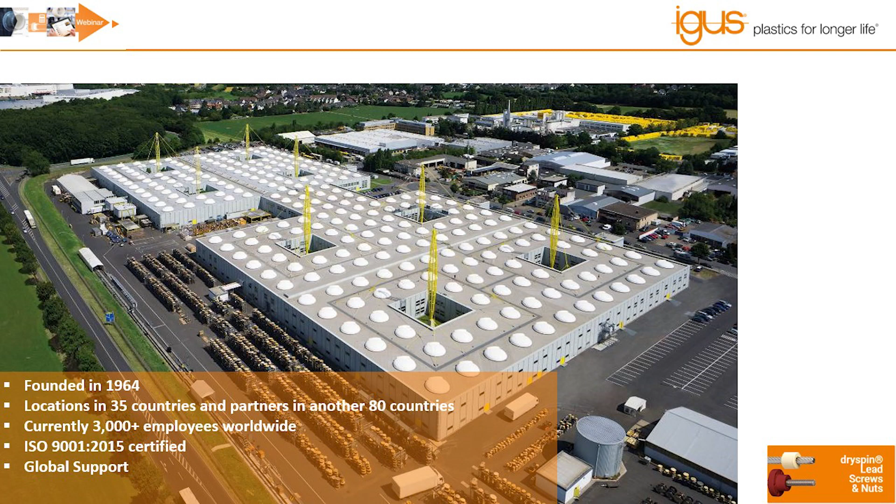For those of you who are not too familiar with igus, we were founded in 1964 in Cologne, Germany. We have since expanded to over 35 countries across the globe, with several thousand employees worldwide. Here at our location in East Providence, Rhode Island is where we are headquartered for all of North America, serving as our distribution center for the US, Canada, and Mexico. This facility is constantly growing.

Some of the new and exciting things we're looking to do in the next few years as part of our 5-year plan - we've already started to expand at an old facility down the road from igus, where we are starting to produce and do injection molding here in the United States rather than solely relying on our headquarters in Cologne, Germany. Currently we have about 40 injection molding machines, and we have quite a few goals to add more. We also have a number of sales reps from across the country.

All of these sales reps are able to do in-person visits with all of you to discuss your applications and find out if igus can help provide a solution. igus has a number of different product lines here, split up into a couple different divisions. We have our cable carriers as well as the cables that go inside of them, a number of which are used in the packaging industry and 3D printing industry, and are found quite commonly.

We have a number of different components that we provide to our customers here at igus. However, at our core, we are an injection molded polymers company. So we specialize in creating compounds that are filled with all different types of fibers and filaments and solid lubricants. igus's goal is for you to get products from us that are maintenance free, where you do not need to use an additional lubricant with our materials.

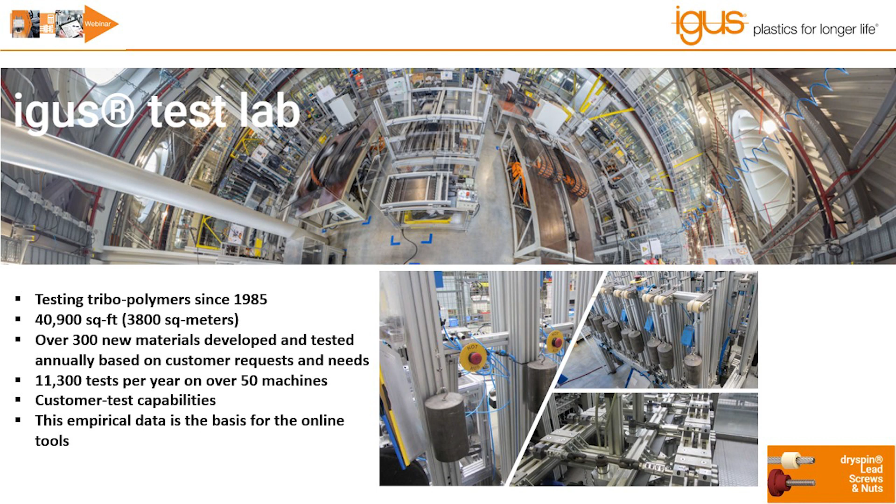Our headquarters in Cologne, Germany has an extremely large test facility. This facility is used to rigorously work through all of the different materials and products we're working on. Everything is revolved around life cycle testing, so we're making sure all of our parts are going to last long for applications. All of that information is continuously fed into our online tools that we'll talk a little bit more about today.

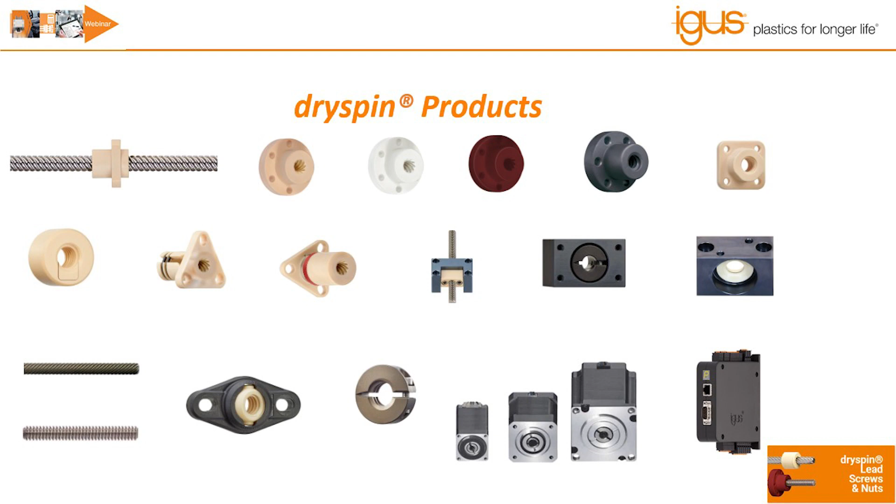Now, specifically with our Dryspin product line, we have a number of different components that we can provide to our customers, so they can get everything they need from igus as a sole supplier if they so choose. We have all different types of lead screw thread profiles - we provide what we call our Dryspin lead screws, as well as standard trapezoidal and Acme lead screws. We have over 9 different standard lead screw nut materials specialized for all different types of applications, whether you need temperature resistance, FDA compliance, you name it, we have a material for it.

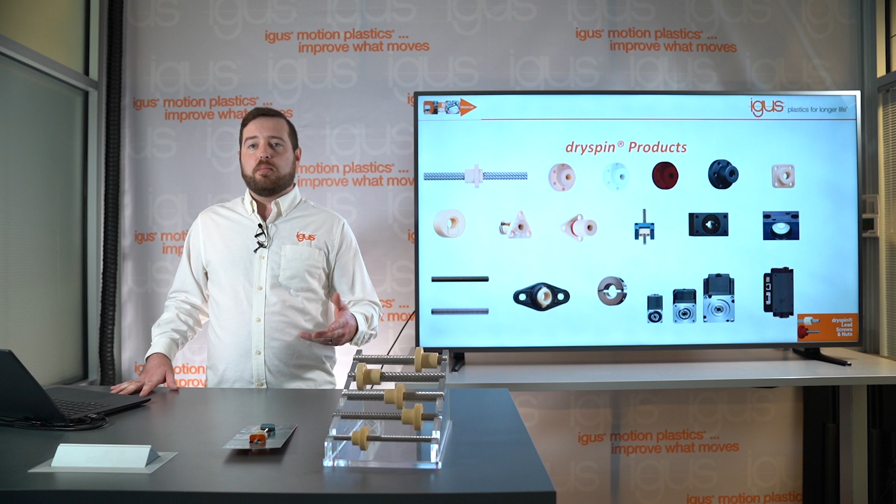We have a number of different components that we've engineered to help reduce clearance in applications where customers are looking for accuracy and precision. We have metal housings for lead screw nuts, end block supports, specialized lead screw nuts for misalignment, as well as spindle motors and controllers for those applications as well. We also have a handful of different lead screw materials as standard catalog parts, but we also provide customers with custom materials if they need them for their applications.

Now, when it comes to 3D printing applications and CNC applications in particular, there's a lot of different scenarios that can play out that determine whether or not you decide to use a screw-driven axis or a belt-driven axis. I typically find that customers are looking to achieve several different things - they're looking to expand their print bed or their workspace for their CNC, and they're looking to achieve higher speeds to maybe increase their opportunity to print more parts per hour.

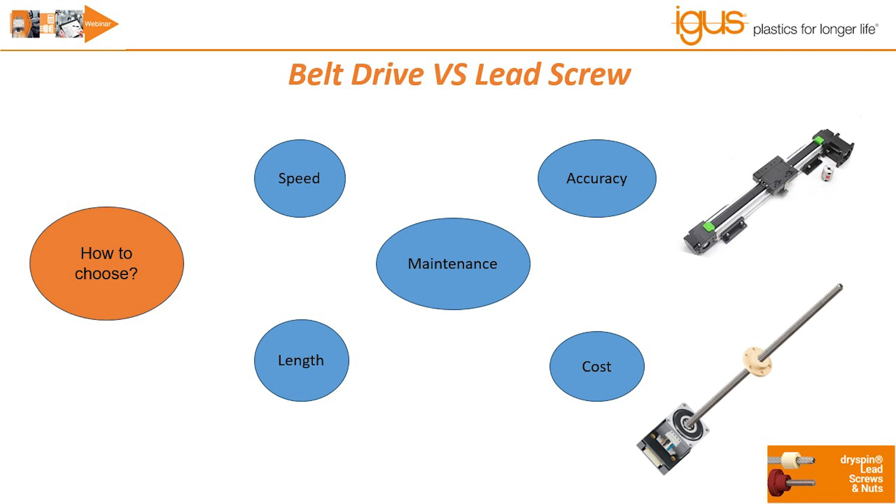Maybe they're looking to provide the most accurate print as possible. Maybe customers are sensitive to cost. These are all different factors to weigh when you're trying to pick what you use for your application. Now, in regard to belt-driven products for CNCs and 3D printing applications, there are a number of different pros and cons, as well as lead screws.

What I find, customers typically gravitate towards belt drives for long stroke capability, high linear speeds, high efficiency output, and they're looking for a product that has a very high uptime.

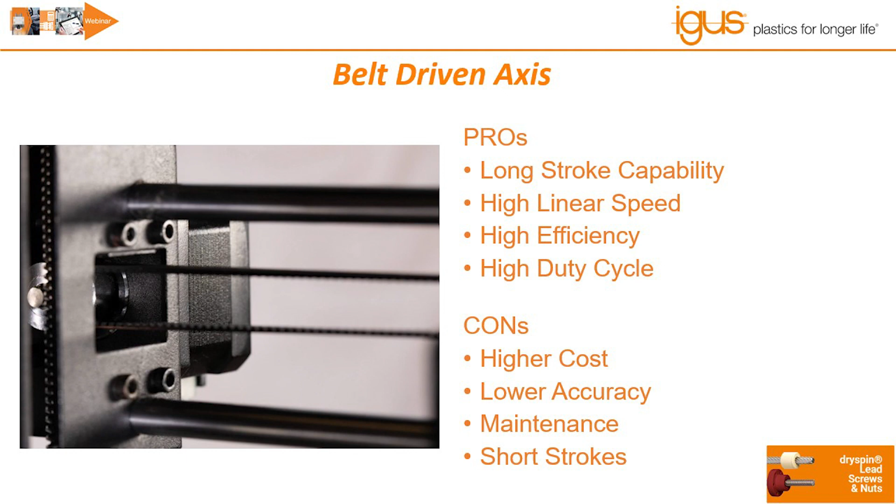Now, the cons to belt drives in particular are very high costs compared to that of a lead screw application. They have lower accuracy, they need to be maintained, and they struggle with shorter stroke applications. A lot of the maintenance comes down to the fact that you need to continuously maintain the belt tensioning in an application. And with short stroke applications, what we find is that when the belt is constantly going over the same portion, it's wearing more in that one area than equal wear throughout the belt.

So that actually will then increase more clearance into the system. That'll cause problems for accuracy, and that'll need more maintenance to basically take that clearance out. On the other hand, with lead screw driven applications, we tend to find that these systems provide a lower cost to our customers. They provide a higher accuracy, and there's a significantly larger number of different products to choose from. There's all different size diameters and leads, or pitch, if you prefer, to choose from.

Now, lead screws do have limitations. Screws aren't going to work for every single application out there. They sometimes struggle with high load, high speed applications. Specifically with polymer lead screw nuts, you need to be sensitive of what we call PV values. So that's the combination of load and speed in an application. It has to do with heat generation and how our polymers wear, whether it's an igus polymer or a competitor's polymer, whether that's PEEK or just a simple acetal nut that's Delrin, POM. All of those things need to be considered when you're looking at an application.

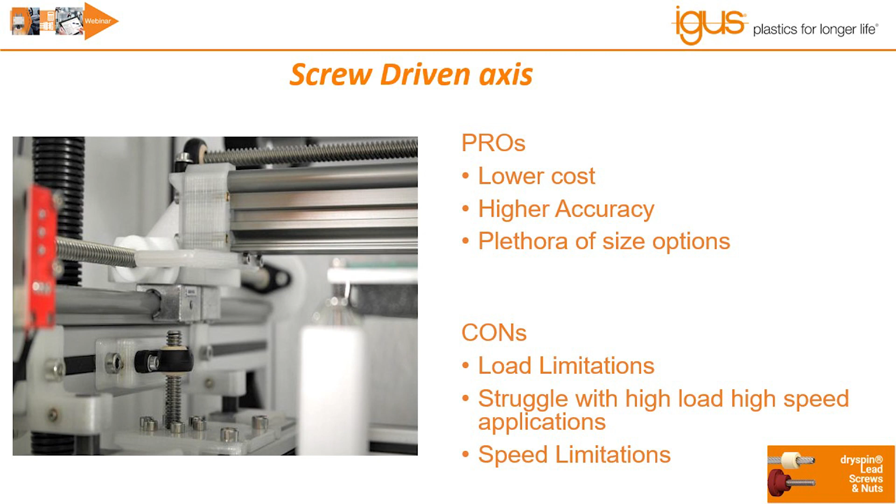Now, where lead screws also tend to differ from belt drive applications are the speed limitations. When customers think about, oh, I want my application to be as fast as humanly possible, they're looking to spec in a belt drive. What I'm here to talk about today is mainly where maybe we can make some optimizations. You can continue to use lead screws to widen that range of application use for the customer and use a lower cost option as a solution.

Some of the common problems and solutions that we find with lead screws in particular for these applications, like we were just talking about, is the stroke length. Typically when you think about a lead screw for an axis, you're basically looking at a smaller product that's going to cover a smaller footprint. Whereas belt drives can scale up. As long as you can make a belt, you can make a longer axis.

Now, one of the things that you can do to continue using a lead screw for this application rather than moving over to a belt drive, you can move up in the diameter of the lead screw. So rather than using a smaller diameter, you can bump up the diameter to achieve higher feed rates, linear feed rates per minute for your application.

You can increase the lead of the screw. Over the last few years, we've expanded our high helix product line and our dryspin lead screws significantly, and we're constantly adding new products to that portion of our product line. By increasing the lead, we're decreasing the RPM. So basically, you're achieving the same linear feed rate, if that's your goal, is to have a higher feed rate, but the actual rotation speed of the screw per minute is going to be lower. So that bodes very well for using a lead screw.

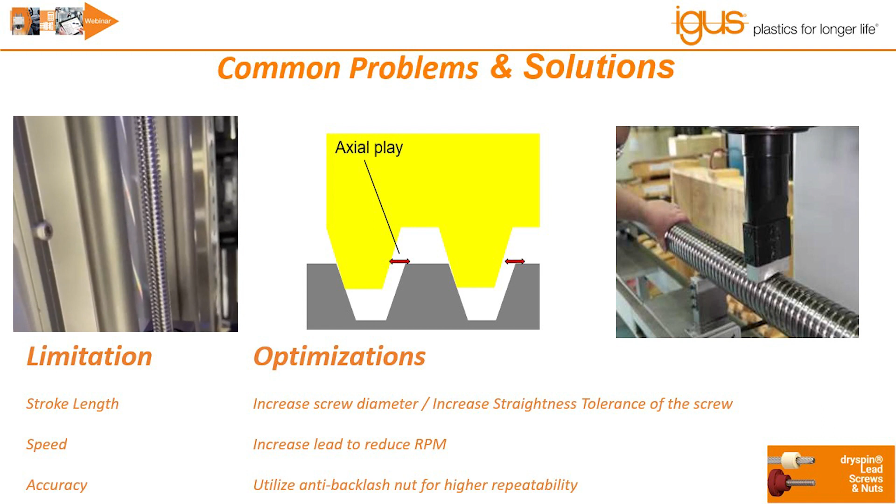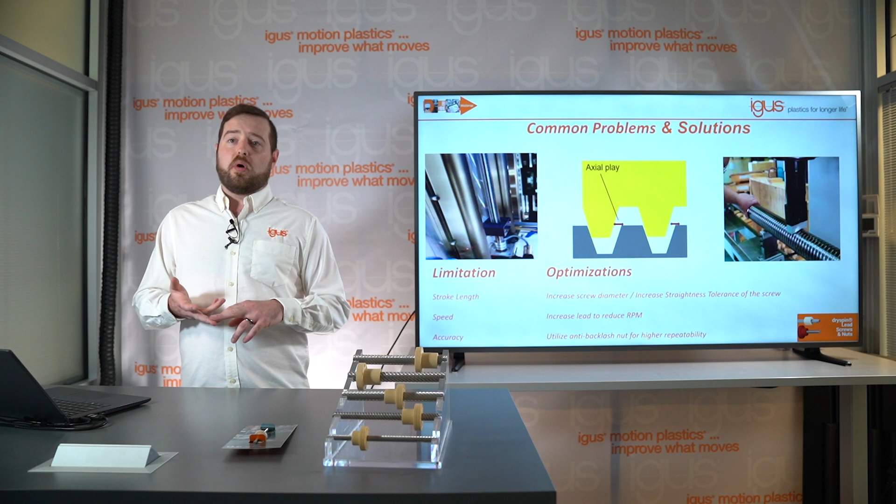One of the things you can do to alleviate that is to utilize a screw with a longer lead. You're reducing the RPM, reducing the chance to get that whipping noise that causes binding in the screw. That binding typically presents as a grinding sound, or sometimes a squealing sound, depending on the part, whether that's a polymer lead screw nut or a metal nut. Especially with metal parts, as they're not maintained and continuously lubricated, that's the type of noise you'd end up hearing in an application.

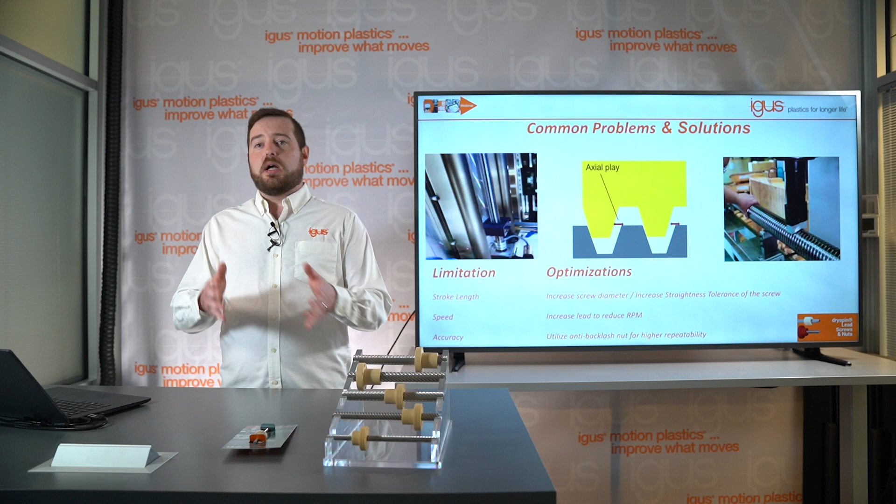One of the other things you can do to help combat noise when using longer lead screws for larger axes and print beds is actually increasing the straightness tolerance of the screw. A standard lead screw that igus rolls comes off at 0.3 millimeters of straightness per 300 millimeters of lead screw, so the longer your axis and stroke length, that tolerance continues to stack up. One added service we offer that can help with this is straightening the screw further, to 0.1 millimeters per 300 millimeters of lead screw, which makes a significant difference in the application.

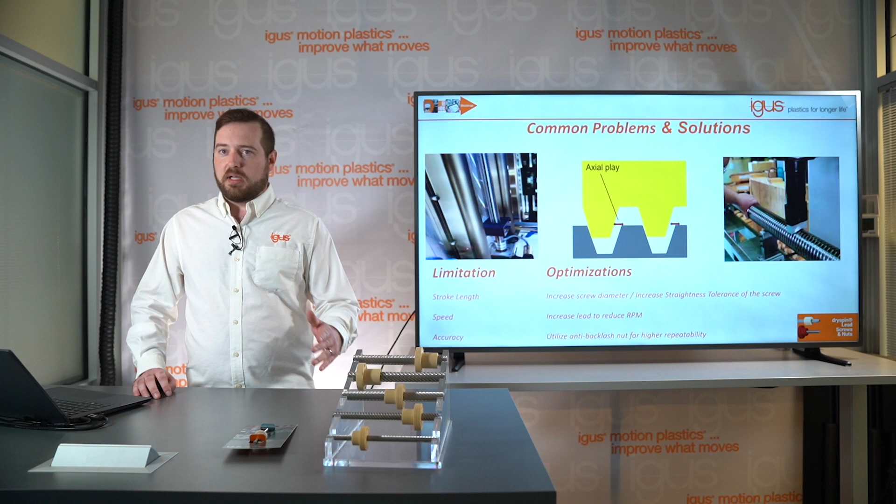Now, some more considerations for using lead screws in 3D printing and CNC applications, especially for extremely long strokes. A lot of CNC applications have workspace areas that exceed maybe a meter for the X or Y axis. One of the things you can do to help avoid sag and whip, that natural bow that causes binding and noise, is to hold the lead screw and end supports in tension. That tension helps keep the lead screw straight in use and reduces the whipping motion you'd otherwise find. Also important is how you're supporting your lead screw in the application.

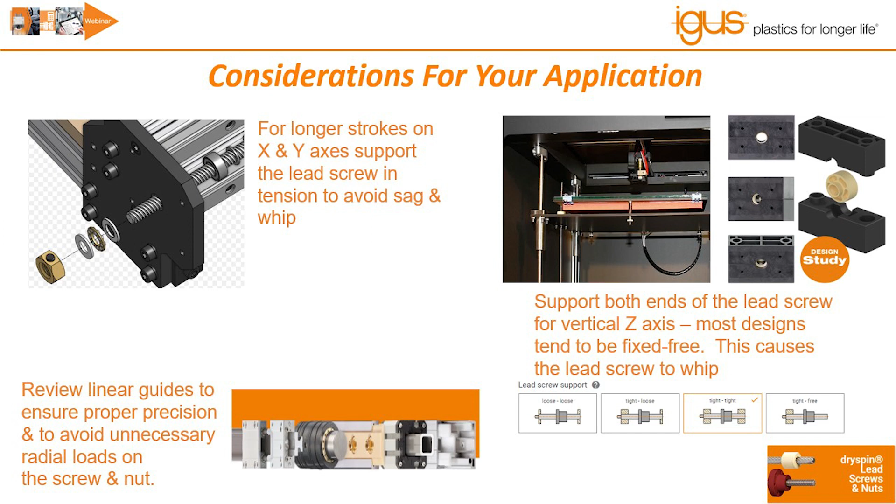Typically what I see, especially with Z-axes, vertical axes, is customers sometimes using a fixed-free method for their Z-axis. This becomes a problem because as the lead screw nut gets closer to the unsupported end of the screw, the other end tends to move off axis. That can cause binding, excess wear in the lead screw nut, and other issues with the print in general.

The last thing I'd want to note is making sure you're properly reviewing the linear guides you're using in the application. igus has a number of different types of linear guide profiles, from our Drylin W, which I find to be extremely popular, to our round shafting. We also have Drylin T, a standard T-rail, and some very low profile guides as well.

On top of that, especially for higher speed or higher load applications where we need to reduce friction as much as possible, customers can utilize a linear ball bearing for their guide and still use a lead screw as the sliding mechanism to actuate the application. This benefits the lead screw — the coefficient of friction is greatly reduced, which drives down the torque required to move the load, and it also provides quite a bit of precision in the application.

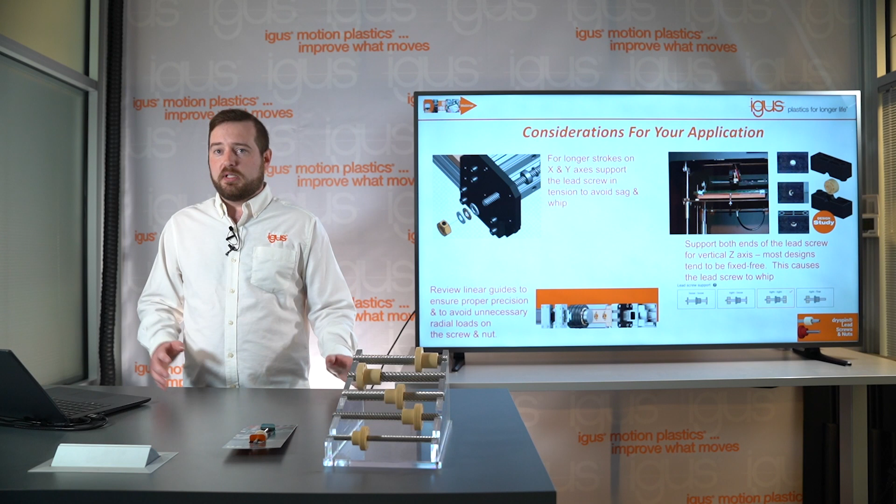There are limitations to sliding components.

igus has a number of different clearance-reducing options: anti-backlash nuts, what we call a zero backlash nut, a preload nut, and also a low clearance nut. All of these parts function slightly differently and do different things. Our zero backlash lead screw nuts provide the best axial clearance reduction, cutting down on backlash in the system. Typically you can achieve anywhere from 0.03 to 0.05 millimeters of backlash in the thread, which helps provide a much more accurate print — couple that with the lead accuracy of the screw itself.

Now we have what we call a preload nut. This is a relatively new product that we released just this year, and we've continued to extend that product line as of late. Rather than using a torsion spring like the zero backlash nut does to separate the two components of the nut, it uses a tension spring. That tension spring does increase the drive force required for the nut, just because of the increased friction from the tension spring.

So you might want to take that into consideration for a solution for your application if the motor size is quite small. That is a lower cost option, however.

Our zero backlash nut has a number of different components that make up the product, whereas the preload nut is just 3 simple components. That does help provide a little bit of a cost reduction, especially for higher volume applications. And lastly, we have what we call a low clearance nut.

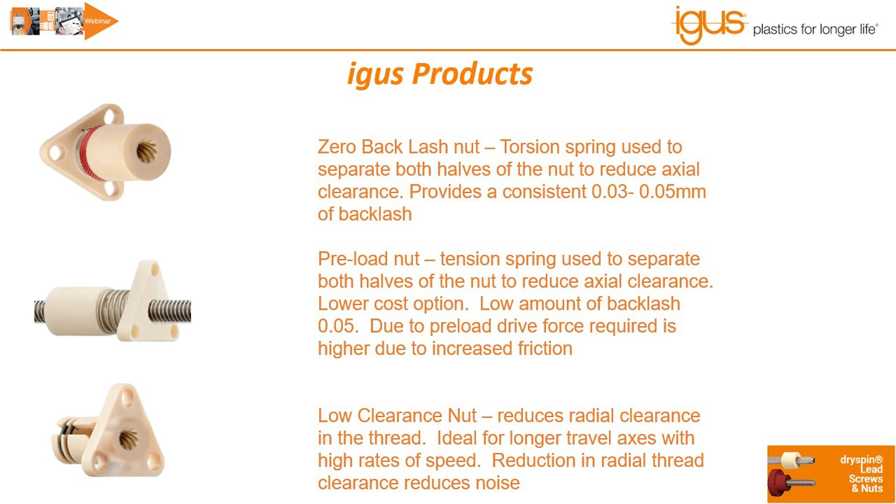The low clearance lead screw nut is an injection molded lead screw nut that we do some post machining to add radial grooves, and then we fashion that with radial bands. Those radial bands clamp the sidewalls of the lead screw nut onto the major diameter of the thread for the lead screw. So that reduces all of that radial clearance out of the thread, and it provides a very smooth running part with reduced noise.

Now, if our standard products don't work for your application, whether it be the mounting fixture to it or the size of the part, igus has a number of different semi-finished products that we can use to machine you a custom part, whether that's our extruded bar stock, maybe it's our plate stock material, or even an injection molded custom part.

Now, for this particular application, for Stepcraft, they make CNCs. They're actually pretty local to us here in East Providence, Rhode Island, not too far away in Torrington, Connecticut. For their M1000 CNC, they utilized a custom machined lead screw nut from igus.

And basically in the fixture, they have two custom nuts opposing each other with a tension spring in it to help reduce axial clearance in their application. And that was for their Z-axis.

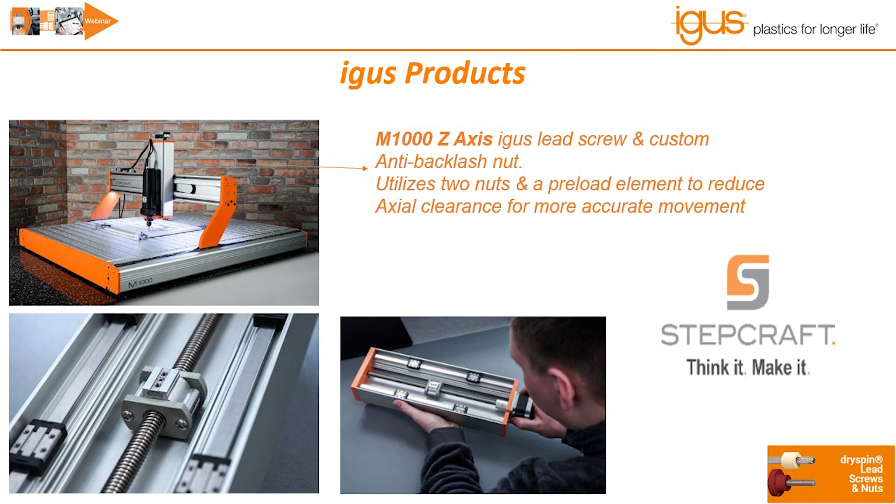Earlier in the presentation, I discussed igus's vast test lab facility. All of those tests that we have ongoing, usually 24/7, feed into our online lifecycle calculators. Now we have different calculators for all of our different product lines, so it's not just for lead screws. All of our parts are meant to be calculatable and configurable, so you can make customized products on our website, but you can also get all the lifetime information for our products.

Now the lead screw configurator, I find it to be probably one of the easiest tools to use that we provide to our customers. You only need 4 data points to make it work: the load, the speed, the duty cycle, and the stroke of the application. That's about it.

From there, your application can get a little more specialized. We provide the ability for customers to include any chemicals that might be encountered in the application, any temperature ranges that we might see in the application. Because igus has different specialized materials, those factors would change what we would recommend for an application.

Other than our standard tests that we do that feed into our calculators, we also provide the ability to do custom lab reports for our customers. So if you're using, maybe it's just not a standard part from igus, and we're making you a custom component and you want to have that tested out and don't have the ability to do it on your own, you can provide to us all the information that you would need for a test, whether that's accelerated testing or just standard use case. And we will basically make up a rig to do the testing for you at our facility.

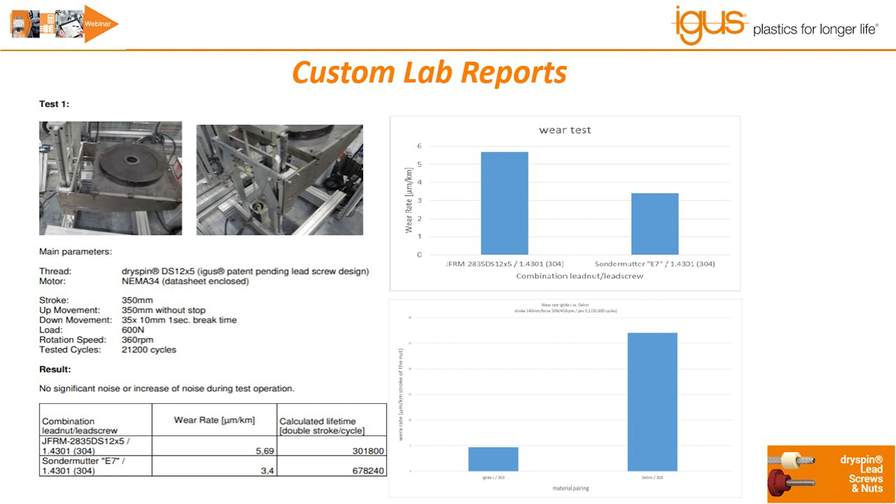Then we have our more specialized materials. igus made an iGlide E7 lead screw nut material. This material excels especially for CNC and 3D printing applications that you're looking at high speeds and low loads. Comparatively, E7 and iGlide J are significantly different when it comes to wear ratings. And E7 provides sometimes, in some cases, millions of cycles for customers.

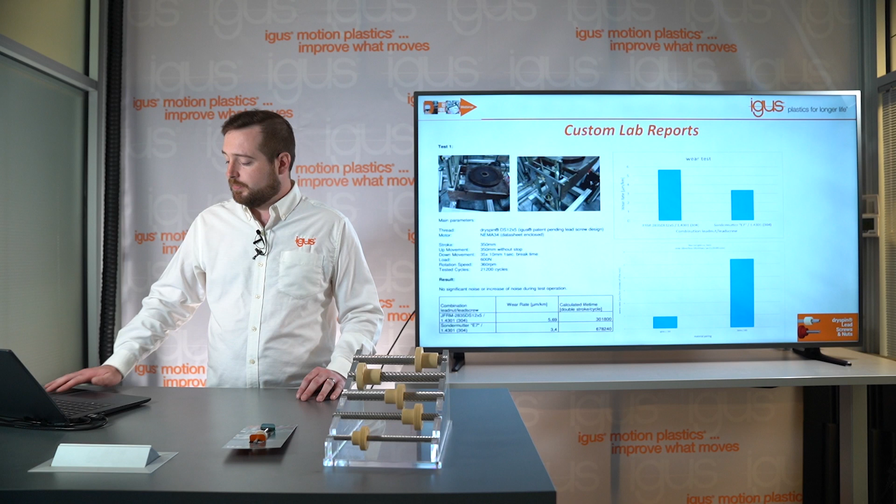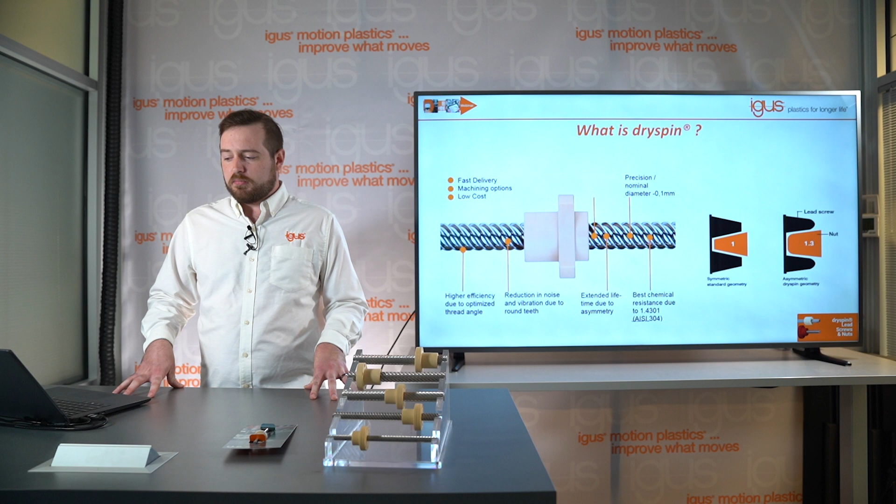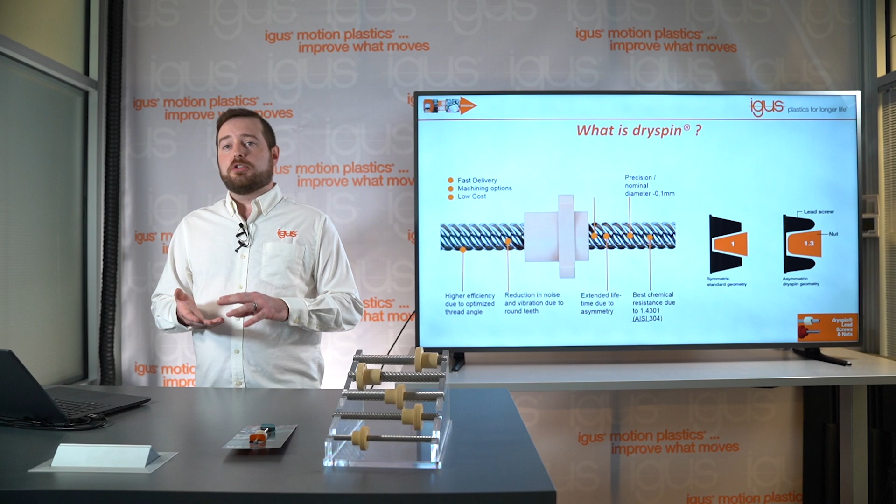One of the things I've been mentioning throughout is the word Dryspin. Dryspin means a number of different things at igus. It refers more broadly to the entire product line that encompasses Acme, trapezoidal, and lead screws, but more specifically our Dryspin lead screws. Dryspin is very special. It's a patented thread geometry that igus created, and it differs quite a bit from standard Trap and Acme thread profiles.

Trap and Acme are considered symmetric thread profiles, where the ratio of material from the lead screw thread and flank to the nut material is a 1-to-1 ratio. Whereas with our thread geometry, we call this an asymmetric thread profile, allowing for about 30% more nut material to be used in our applications. This provides more material to wear over time, so it's naturally a longer lifetime for the part, since the lead screw nut is the wear item.

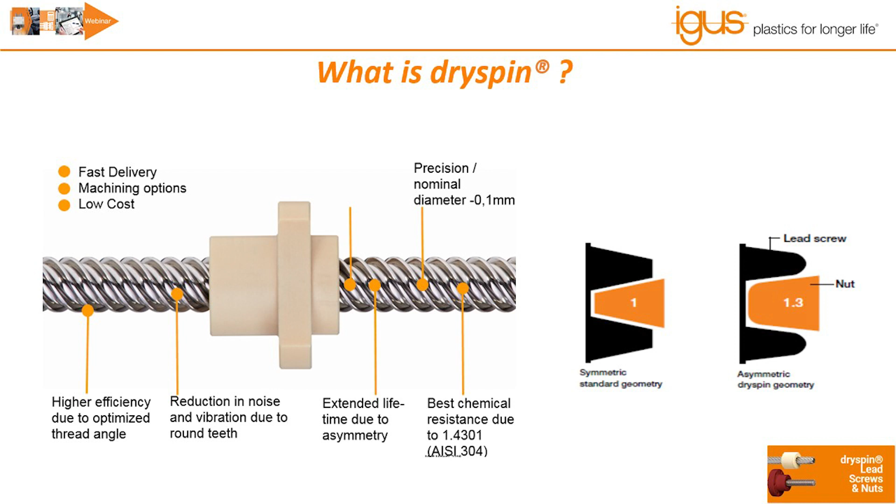Now, it doesn't end there. The thread geometry itself has a curvature and rounding of the tooth, and this helps reduce noise, especially in higher speed applications. Now, probably one of the biggest differences between Dryspin and standard Trap and Acme lead screws is what is called thread class.

Trap and Acme adhere to ISO thread classes, to ASME thread classes. All of these are dictated by min-max dimensions for the major diameter of the thread, whether that's the lead screw as an external thread or the internal diameter of the lead screw nut. Those min-max dimensions cause a problem in applications, especially when we're looking for a high amount of accuracy and precision.

Dryspin is more of a precision product. We control the dimensions of the thread and provide a more precise product. So the major diameter for the majority of the products is a +0, -0.1, and the same type of dimension for the minor diameter as well.

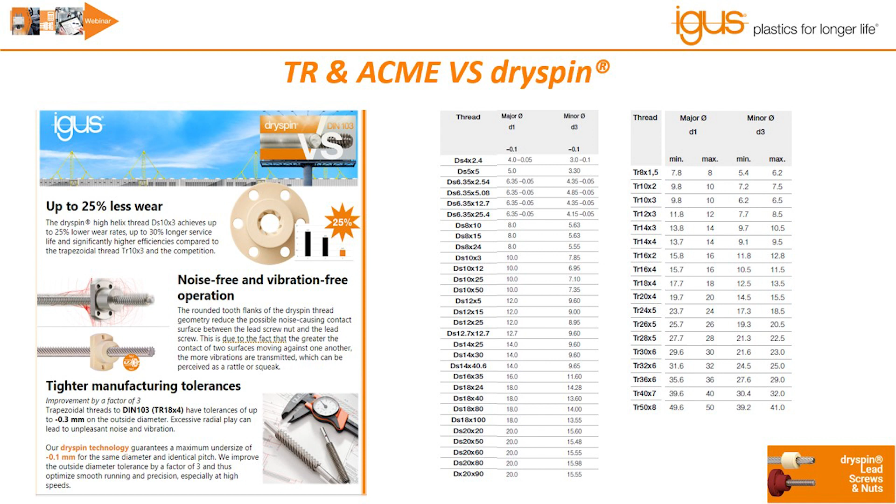Now, when it comes to all the different specialized materials that igus has to provide, we have over 50 different materials at igus. We have over 9 different materials specifically for lead screw nuts.

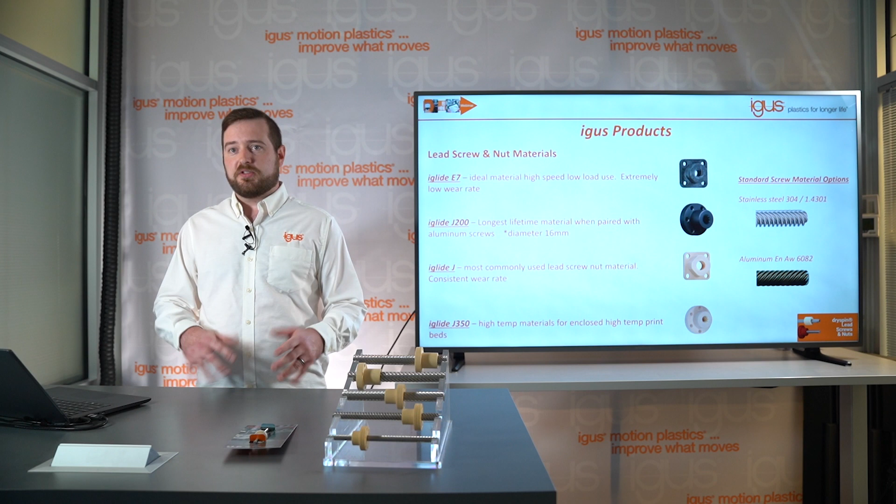Some of the standard materials I recommend specifically for 3D printing and CNC applications, because they're typically higher duty cycle, higher speed applications, are ones that have very good wear resistance. As noted before, our iglide E7 nut material is probably one of the best for these types of applications. However, it is ideal for low load use, maybe some smaller 3D printer applications where the loads are manageable.

Now, as we're increasing the load, we have some other materials that work a little bit better. Our J200 lead screw nut material is best when paired with an aluminum lead screw, and this actually has some of the best wear rating and wear resistance across all of our lead screw and nut material combinations. The only caveat is that aluminum lead screws typically are rolled here at igus at 16 millimeters in diameter and up.

Then we have our most commonly used material, iglide J. And for more specialized applications, for example a 3D print bed where the lead screw and nut are enclosed in the bed itself and might be subjected to higher temperatures, we have what we call iglide J350.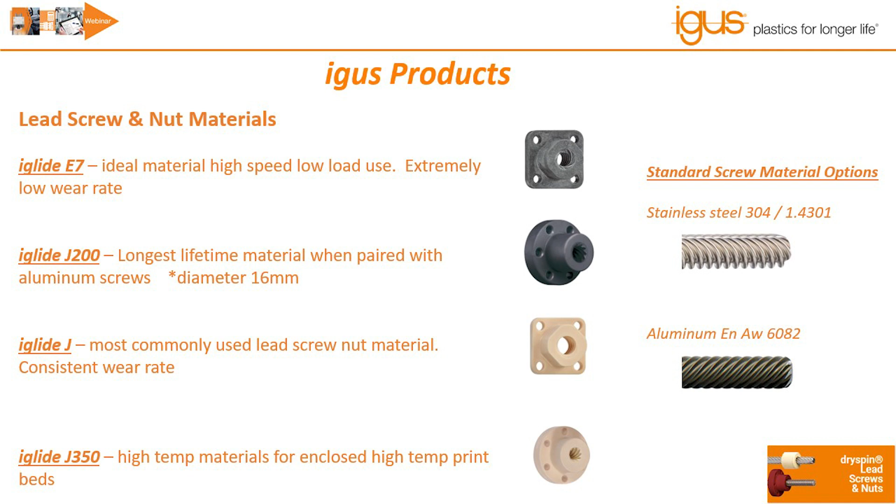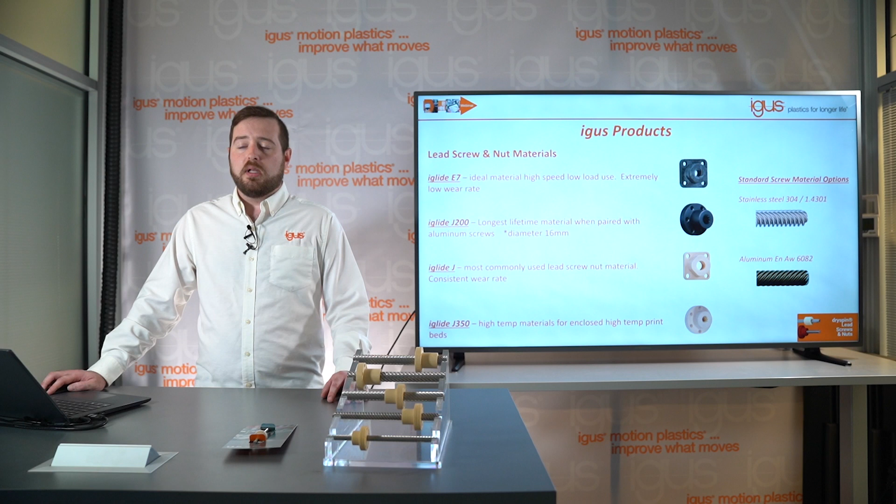Now, as we mentioned before, we have a couple different lead screw materials here at igus. All of our Dryspin lead screws come standard as 304 stainless steel. Our Acme and trapezoidal product lines have a number of different standard 300 series stainless, but we wanted to make it universal specifically for our Dryspin products. We also have the ability to provide aluminum lead screws, especially for applications where customers are looking for a lightweight product.

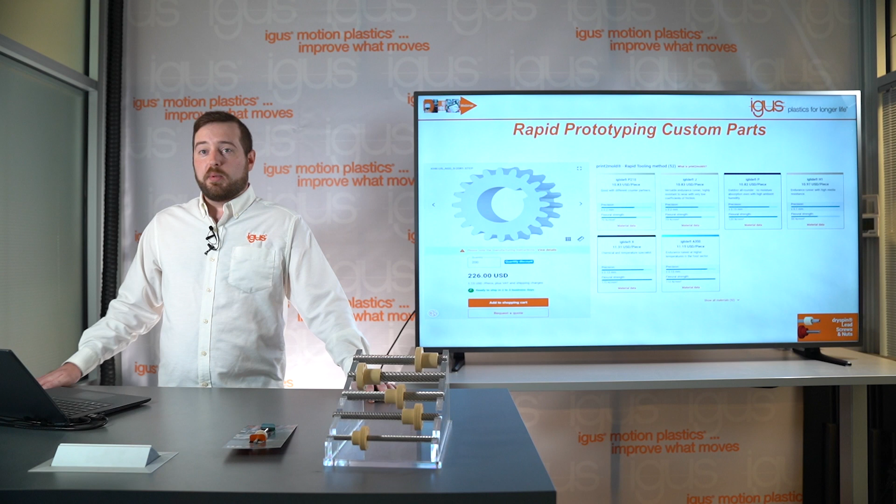Now, if our standard lead screw nuts are not going to work for your application, whether it be the mounting structure, the overall size of the part, or maybe we need a longer thread length, we have the ability to make custom parts here at igus pretty easily. Our rapid prototyping custom parts are 3D printed in-house, and we have laser sintering capability here in the US.

The online tool allows you to drag and drop your step file into the tool, and that pricing tool will actually spit out a price to you that will keep lowering based on the amount of available room in the print bed.

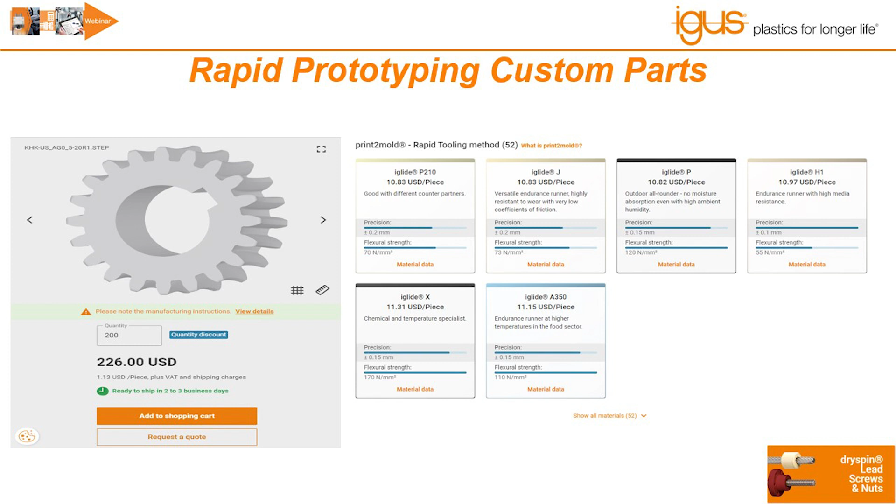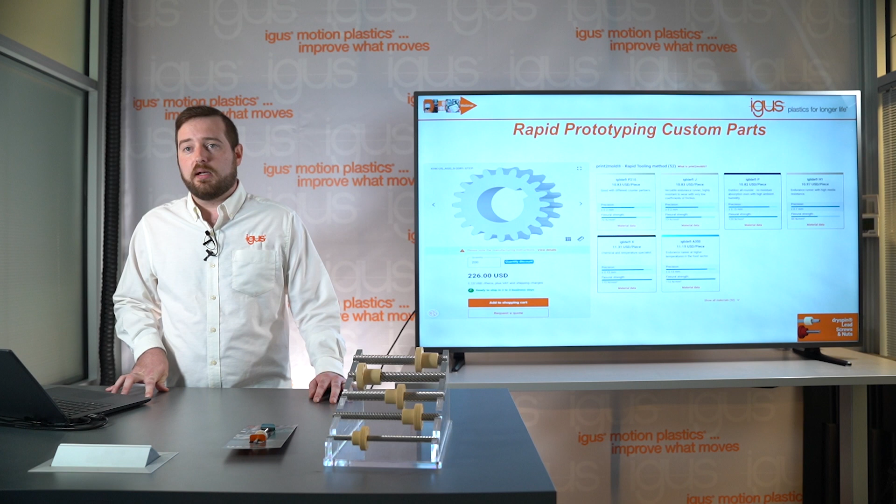One of the other ways that we can provide a custom part to our customers without investing in a production tool is what we call print to mold. Our print to mold process, we have a number of different materials that we can work with for this, but more specifically with the tool itself, this is a laser sintered steel tool, and the lead time is typically about 2 to 3 weeks to get an injection molded part that is custom. The cost is very easily and manageable.

To get started with a print to mold part. These are very ideal for customers that are moving forward with their design, they're hashing things out, and they want to see how that part is actually going to function without investing in a production tool.

Our SLS laser sintered parts, however, have different wear properties, the materials function differently. I find that the laser sintered parts are very ideal for customers that are getting off the ground. They want to get a part that is going to fit into their application just for form purposes, not necessarily doing high duty cycle testing or even accelerated testing with those parts. The materials do wear quite well, it's just not up to snuff compared to our normal catalog materials. So that's when we would recommend that customers segue and move to the print to mold features that we can provide to our customers.

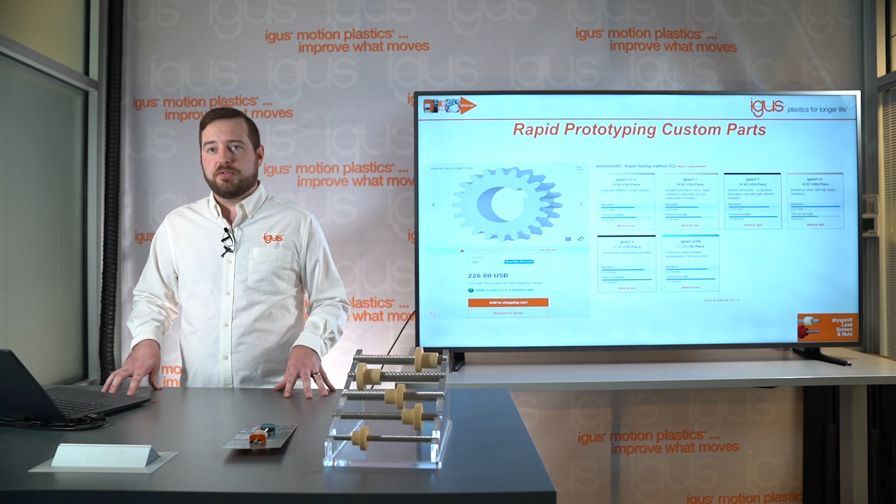Now, just talking a little bit more about some of our 3D printing materials, we do have the ability to provide customers with FDM filaments, and we also have resin that we have made as well. And we do sell our SLS powders. Like I was mentioning, the wear resistance of these materials is quite good. It's just not as good as our standard extruded bar stock materials or our molded materials. They just function differently based on the production method.

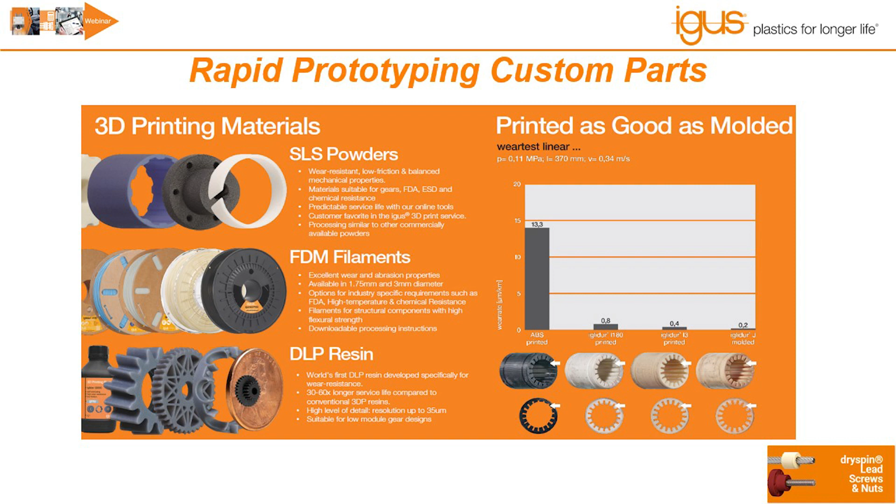Moving away from custom lead screw nuts and our standard products for lead screw nuts, it's more or less talking about the custom screw itself. Directly through igus's website, we have a number of different custom part configurators. Our online tools are very interactive. You have the ability to make a fully customized lead screw, and it should be delivered in anywhere from 3 to 5 weeks, which is the standard lead time.

The online tool scales up in pricing up to 49 pieces, so if you're just doing prototype parts, this is the perfect tool to use and get started for your application.

So whether you're adding just simple journaled ends, maybe you're adding a keyway, feather key grooves, maybe you need to utilize the lead screw with a stepper motor and just directly couple the screw to the motor, you can add secondary thread profiles to the journals that you have machined onto your screw.

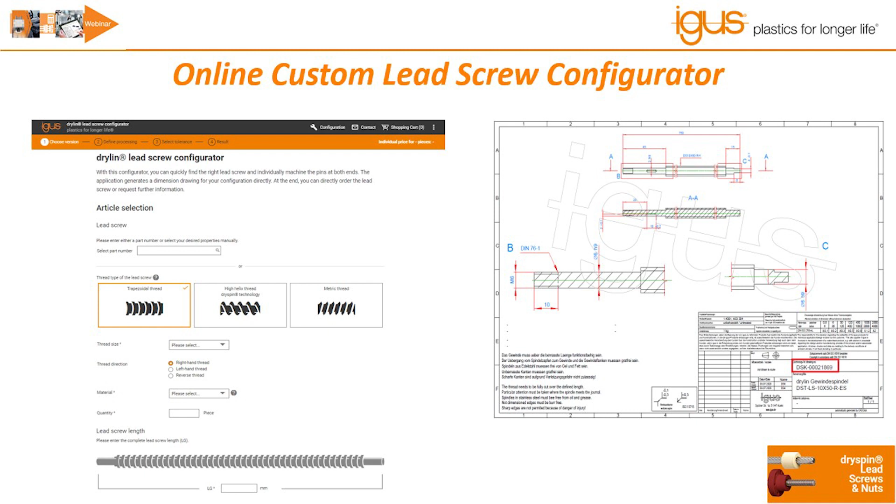Now, the tool doesn't just provide a price, it also will give you a 2D print that you can download as well as a step file. So this tool can help take care of everything that you need all in one spot, and you can do it completely on your own from your office.

igus has a number of different additional resources that we can provide to our customers. We have what we call the igus toolbox. This is a compendium of all different types of materials, from our white papers that go into in-depth tech talks, to blog posts. There's a lot of really good touch points that customers can take a look at to get ideas for their applications and see if products are going to work for them.

Some of these blog posts tend to be industry focused, maybe for a very specific application, for example, customers looking for clean room parts. We also have a lot of our different online materials, and we're constantly filming videos for customers via our YouTube page. I highly recommend that all of you check out those product videos.